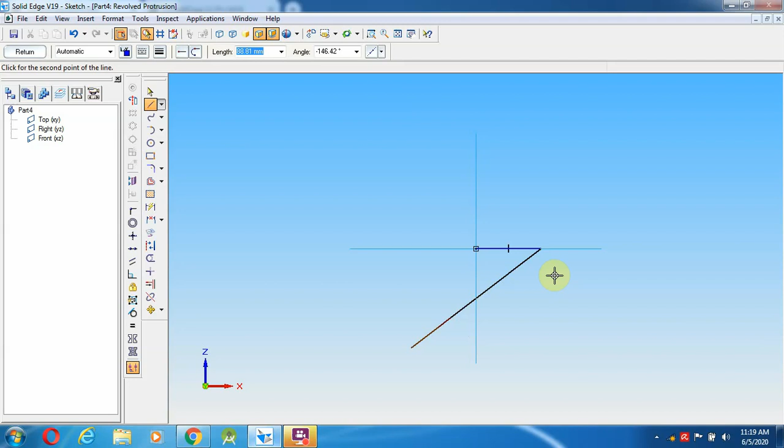Here the total height is 46 minus 26. From 26 the inclined line starts, so we are getting 20 mm height over here, and I'm going to stop.

Then from here I am going to draw a 46 mm height line.

And what is the diameter for this? It is 46 mm, height also 46, and diameter 46 means a 23 mm line.

After drawing the 23 mm line, we can directly join it because no angle has been given over here. After drawing this, on the top use the fillet option.

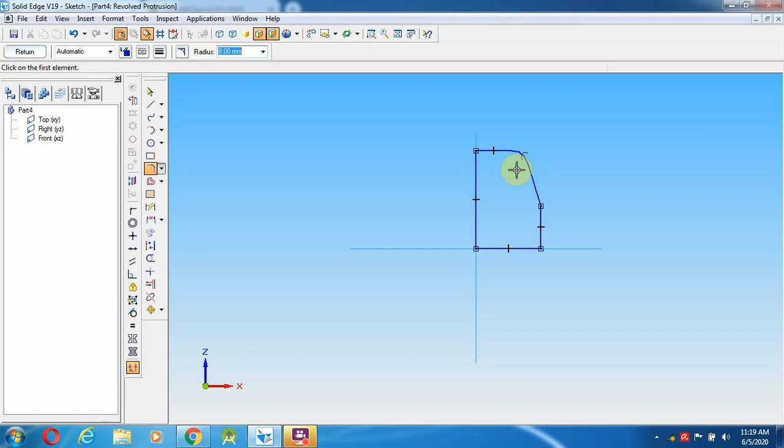The radius given is 8 mm over there. So here you can see the radius is 8 mm.

Then coming into the middle, the hole is coming. That hole I am going to make as 25 mm, M25, meaning V-shape thread and 25 mm diameter.

First I am going to create the hole here itself, not 25 but 12.5 mm, and down.

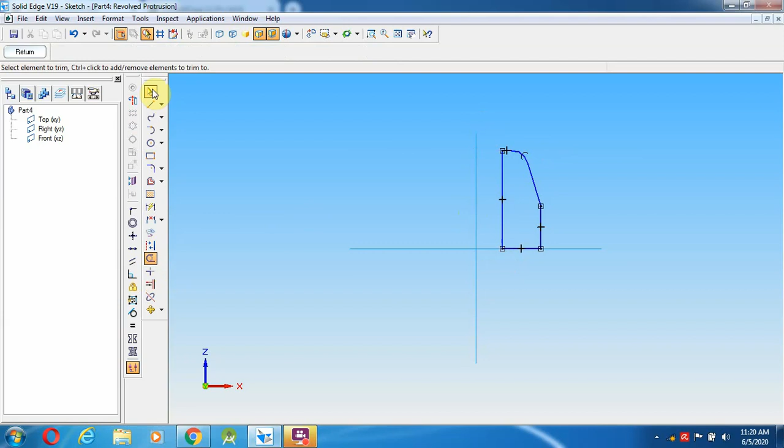Then select the trim option. The trim is for where the surface is not prepared. Then go here and select.

Select the axis of revolution as the mid plane, give rotate. I'm going to give 360 degrees, left and right click.

You can save the part as mover. After saving the part, we will make the necessary changes.

Then at the bottom there should be a small circular cutout. For this, I am again going to use the revolved cutout option and select the mid plane.

From selecting the line, from here, what is the length? The length is 46 mm, so I'm going to give 46, enter.

Going to select a circle. From here, 46 mm means that's the diameter, radius 50, and the diameter is 100.

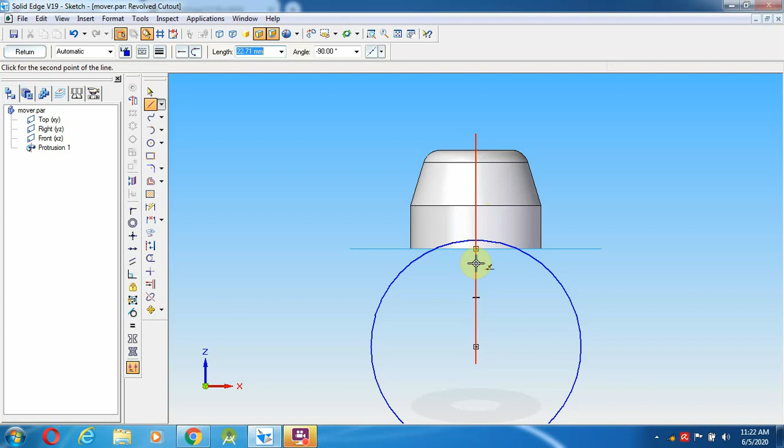So you can go over here, select diameter as 100, enter. Now I'm going to draw a line from here to here, and from here to here.

One more line I am going to draw. Then use the trim option - all these lines I am going to trim.

This one also I am going to trim, and this is also a trim, because we actually require this particular surface.

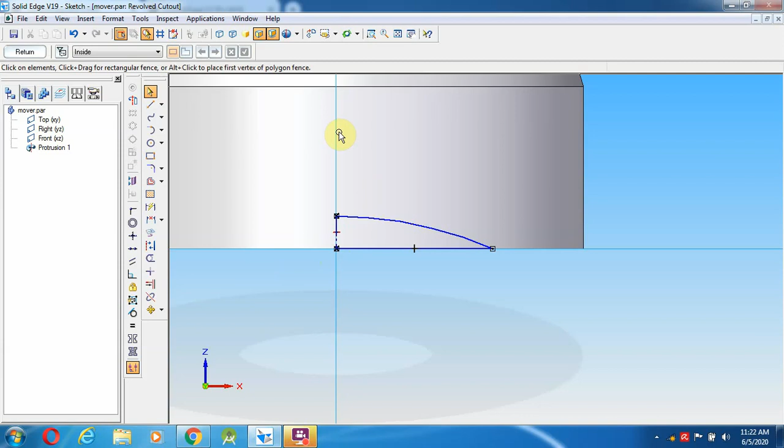Then I am going to select the axis of revolution as this one, the middle line. Even if you select the axis of revolution as a mid plane, it won't come unless you have drawn the line.

Then give 360 degrees, and after giving the 360 degrees, you can save the component. So after saving the component, what is the next step?

This is the hole I have to create from a 13 mm distance. From the top it is the 13 mm distance.

Go over here, select first with the use of sketch. I am going to make a line over here.

That line I'm going to make from here to this line. This is for reference.

And also one more line I'm going to make from the straight line, anywhere in this line, from here to 13 mm distance, to the straight line.

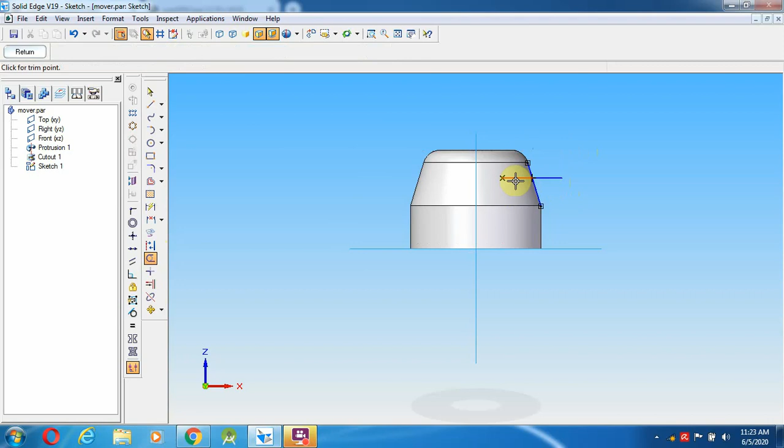After that, any one line I'm going to trim it, and this is reference - this one I'm going to keep, this is the line.

Afterwards I'm going to draw a line from exactly this particular end. So instead of deleting, I'm going to trim this side, and now select a line from here to draw one line.

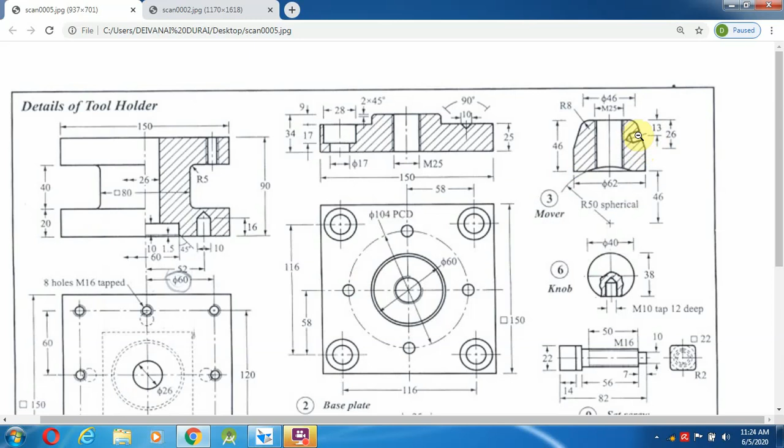Okay, so what is the distance of that line, and what is the diameter of this hole? They are not given here, so we are going to search for it.

So this mover, where will it be going to fix in the top and come to here, see over here. So here they are given as a handle, it is going to fix over in the mover. So one end will be the mover, another end will be fixed with the knob.

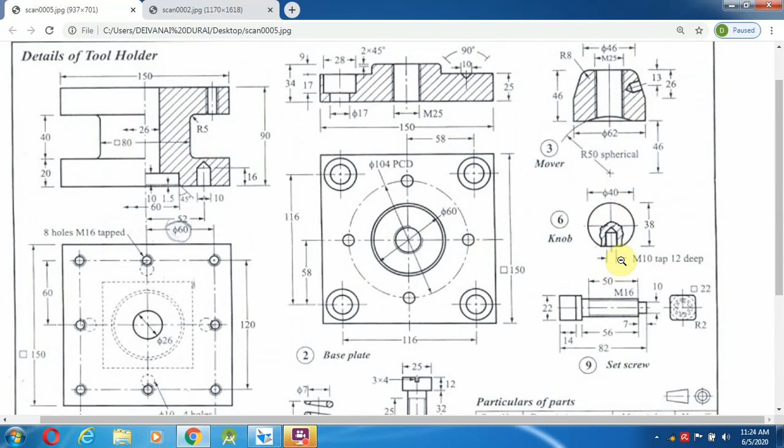So the knob diameter is given as 10, but here one more side the 10 mm is given over here on the handle, then 8 is there, so that 8 mm we have to create, the 8 mm hole having the length.

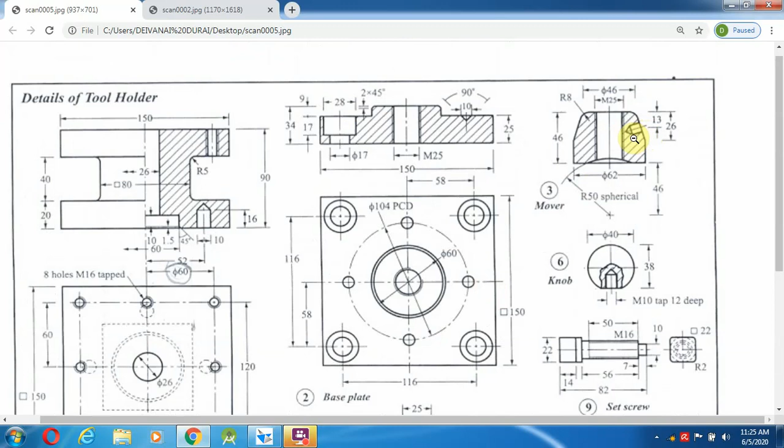So the length, how much mm - even the length also you can find over here, so that also 8 mm. So here it's not the 8 mm diameter, the diameter also same, so here also it is the 10 mm diameter only.

So 10 mm diameter, 8 mm length. So that we have to create, this hole I am going to create up to the 10 mm, 10 mm and V shape. So from here I am going to make one line of length 8 mm distance.

Going to place, then select the option called perpendicular. So this line as well as this line I am going to make it as a perpendicular one.

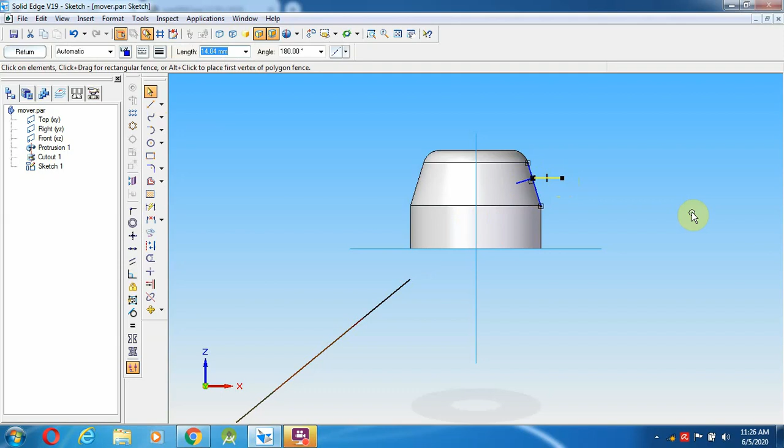Now there is no requirement of this line, I deleted it over there. Then I am coming out, so I will give the return. So after returning, go over here, select the planes.

In the plane, perpendicular to plane, normal to curve plane you can select. Then from the particular line, from the mid, I am going to place the plane over here.

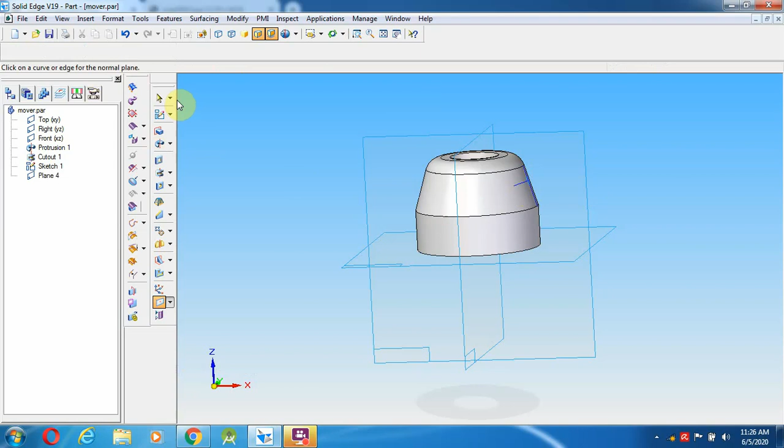Even if the plane is too small you could not see it over here. Now if you zoom, the plane can be visible. Then I can go again with the sketch option.

I can go with the cutout option. So this particular surface I am going to select. Along with the plane it is going to cut.

Better I go with the hole option. Hole, this particular plane, select a circle. So in the circle, if you move over here, the point can be visible.

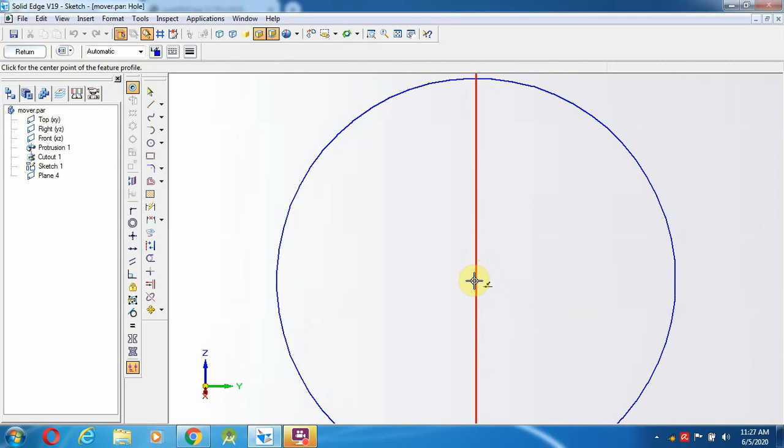Otherwise, to come out, and again you can select hole. So this particular plane you can select, somewhere in the mid it's coming over here. Select this one having the simple hole, having the diameter of 10 mm.

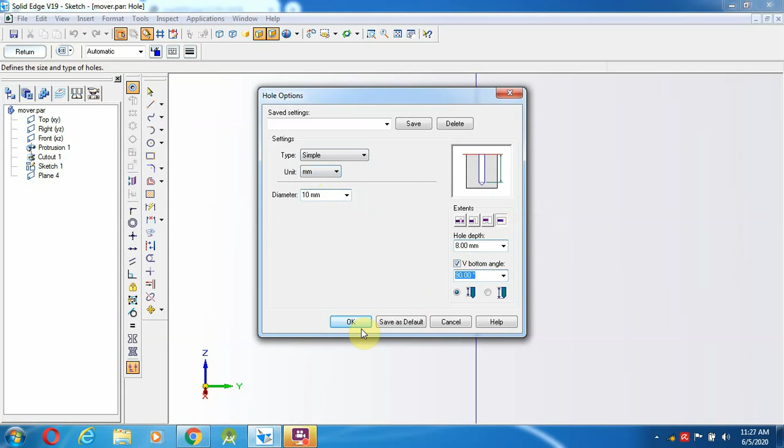10 mm, as well as length 8 I am going to give, 8, as well as the V bottom 90 degree. Give OK, I am going to place exactly in the line.

Okay, then going to give fit. I am trying to rotate, to check if it is correct or not. So exactly we will place it in the point.

And give return, left and right click. So the hole has to be created over here, exactly. So this is the way the hole has to be created.

So after creating the hole, then we can go and search over here if anything is pending. Only thing is that threading has to be done over here.

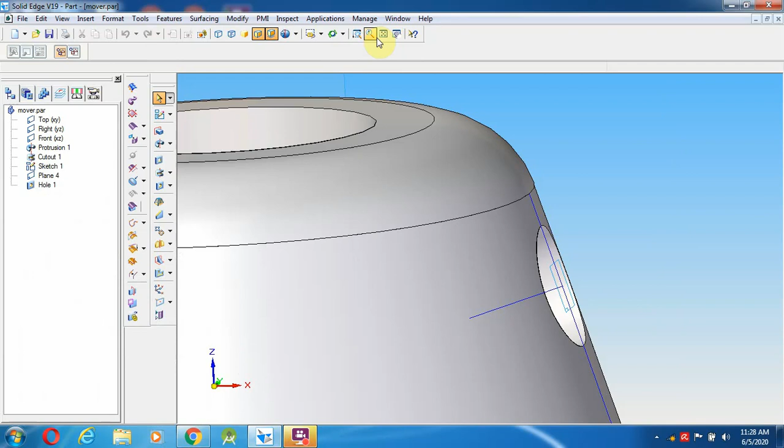So go again with the hole option, click over here. The threading can be seen, straight thread from inside, from top to bottom, and left and right click. The threading has to be created over here.

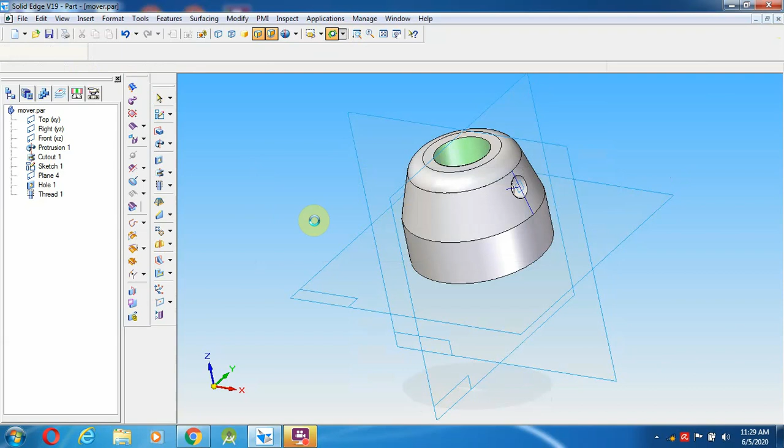Okay, so after creating the thread, again close this mover. Okay, so after closing this mover, yes, change the path, then go to the next one. What is the next one?

The third and the fourth component is the stud. It was very easy because of the single part, it can be completed with a single profile. So what is that? The diameter is 25 mm.

So M25, up to 6 mm, 60 mm length from this side, it is coming as threading. This side 30 mm length, the threading is coming over here. Okay, so how to create these things.

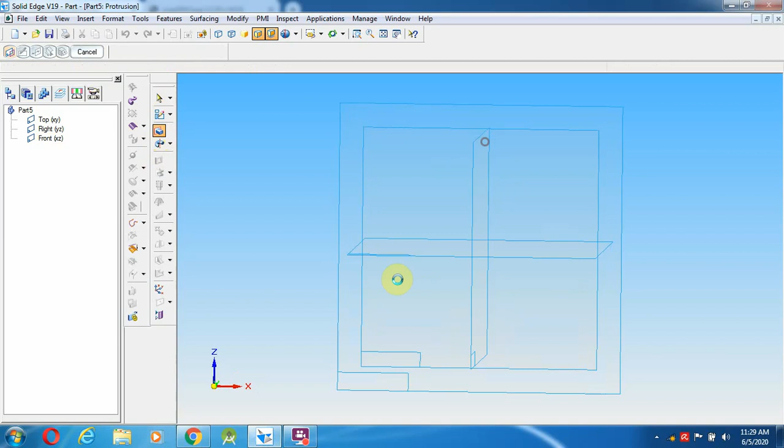First select a protrusion from here, and what is the diameter? 25 mm diameter. Select a circle from here, 25 mm diameter, and go over here, return.

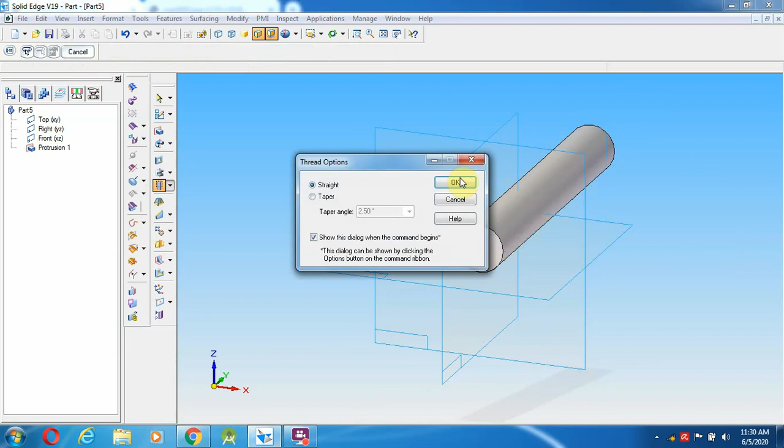So how much distance does it have to come? 160 mm. So go and select 160, enter, left and right click, and go to the threading option here. Give OK, thread starting from here.

So the finite value is 60 or 30, I am going to give over here. So I am going to give the distance, 30. Okay, enter. So even though it will go to select as a full thing, it's not an issue.

You can save this as a stud. Save as, and that will be the fourth one, it's called stud.

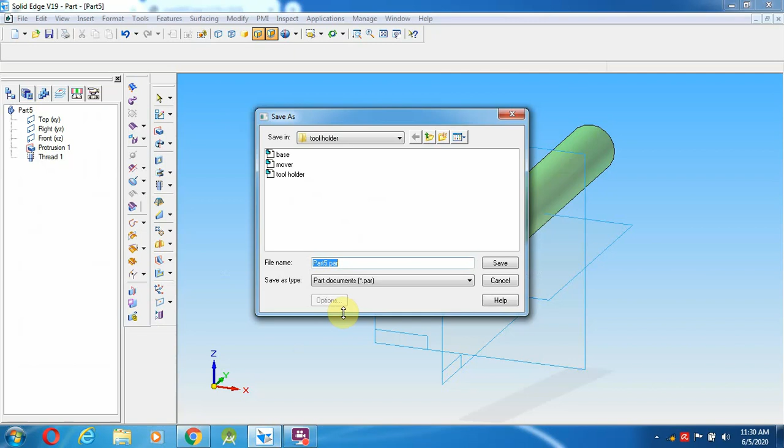Stud, stud, save. So the fourth component is over. Then comes the next one, the fifth one. Which is the fifth one? Second, third, fifth is the handle. Handle is also similar to this one only. So go over here, select.

Solid part on the protrusion, select circle, diameter is 10 mm, having the length of 114 mm. Enter, left and right click.

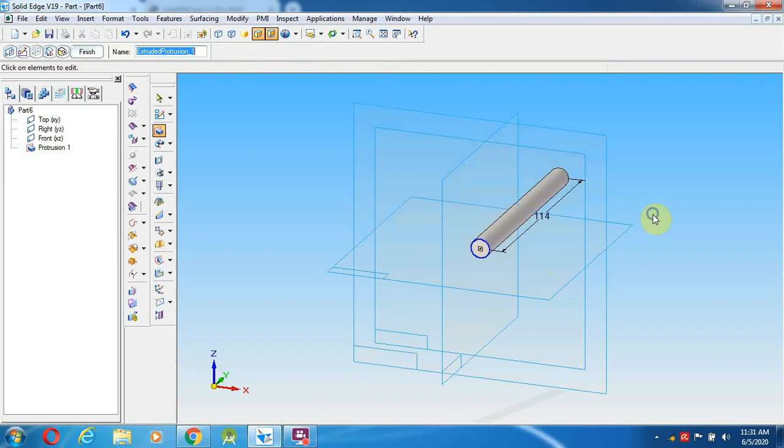Goes to thread again, give OK from the component starting from here. What is the length? 10 mm. So I am going to give the finite value as 10 mm. Enter. So even this also comes full length, it's not an issue, we can give over it.

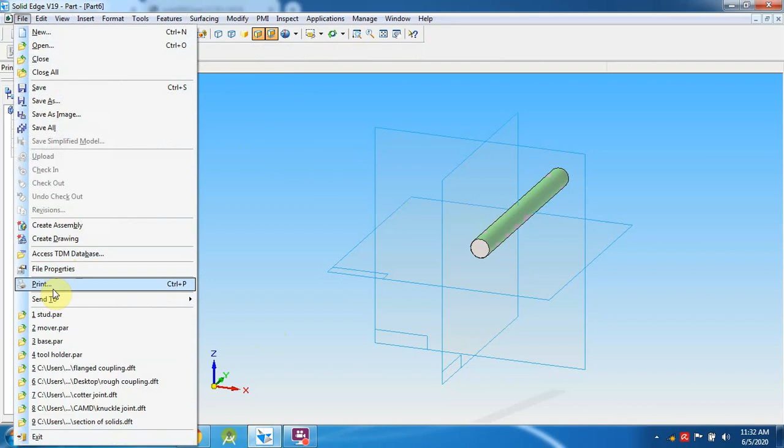So then this has to be saved as HNDL, handle. After that, going to close it.

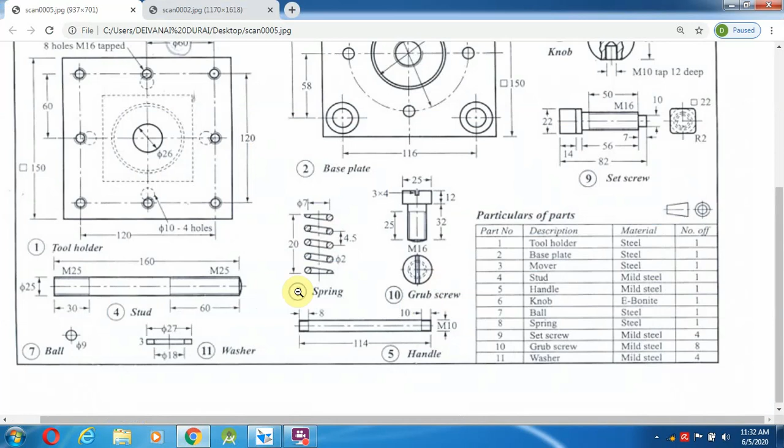Then the next part, which is the next one, fifth and sixth one, this is the knob. Okay, so that we will see now. Knob. So the next thing is we are going to draw the knob.

So to draw the knob, what is the diameter of the knob? It is 36 mm. From bottom, top to bottom is 38 mm.

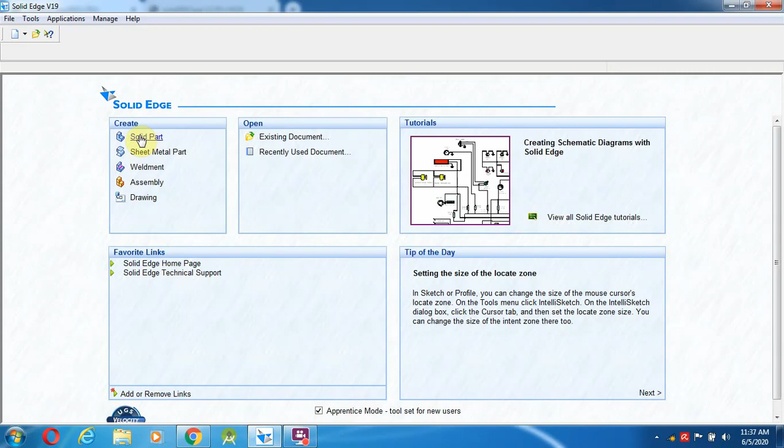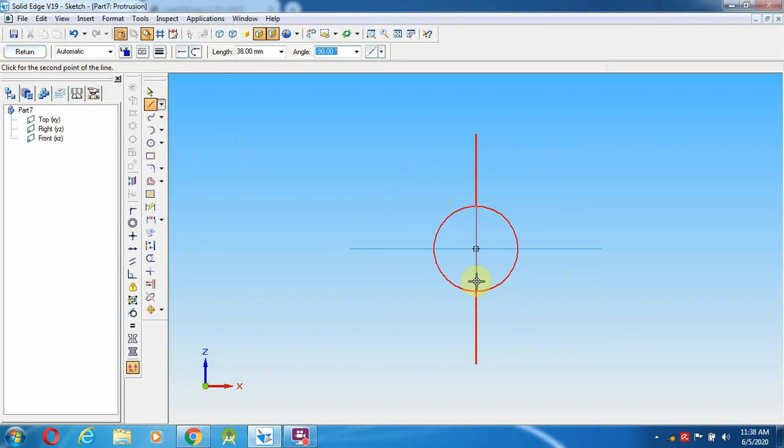Select solid part, go to here as a protrusion, select any one of the plane and go to draw the diameter. Select a circle from here to draw the 40 mm diameter. After selecting the 40 mm diameter, from top to here is 38 mm. Enter towards straight horizontal line and go to over here.

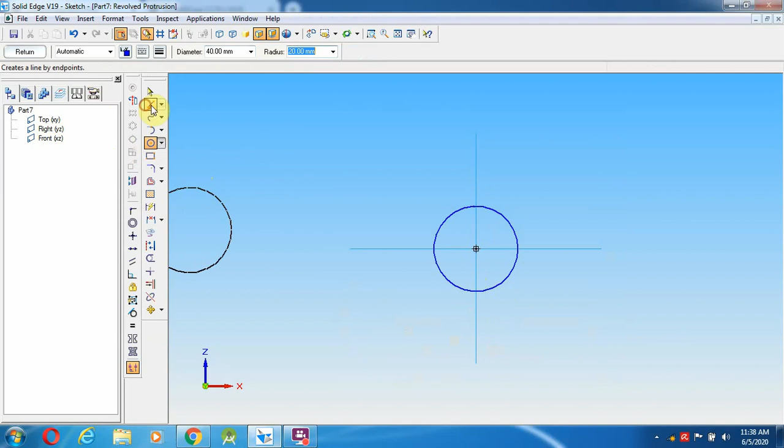So this I am going to draw with the revolved protrusion option. Mistakenly I selected the protrusion option, so I am going to return, select a revolved protrusion option, select the plane again. Go over here, select a circle, diameter is 40, select a line from here to 38, enter and straight line.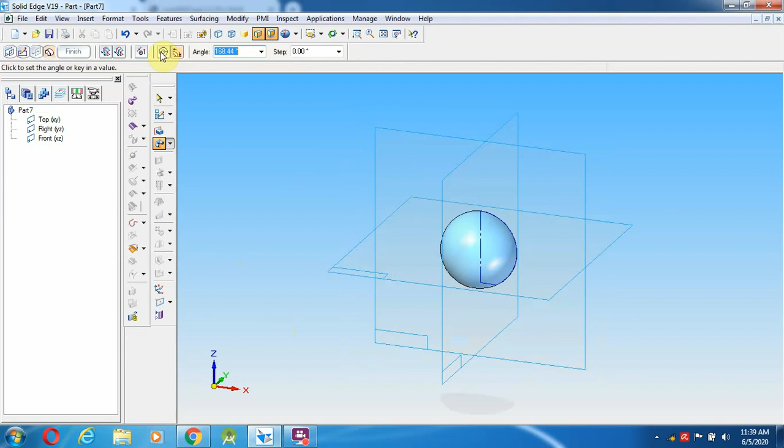Then I am going to trim the surface, this as well as this. After trimming, go and select the axis of revolution, as this is the axis of revolution, and give return. The angle is going to be 360. So the protrusion has to be created over here.

So here the thing is, what is the one more thing? The small partial section made over here, that is the M10 tap, 12 mm deep.

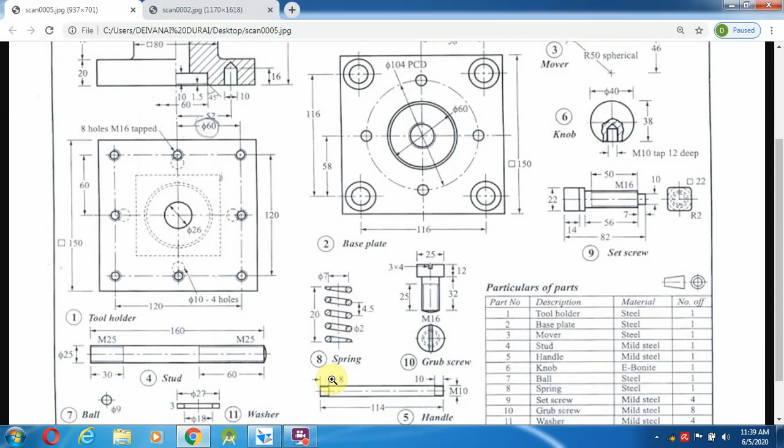Go to the hole option, select surface from here, hole parameter simple, 10 mm diameter, 12 mm deep, and also it is the V bottom, 12 mm deep, 10 mm, 12 mm deep and V bottom. So V bottom, that is 90 degree.

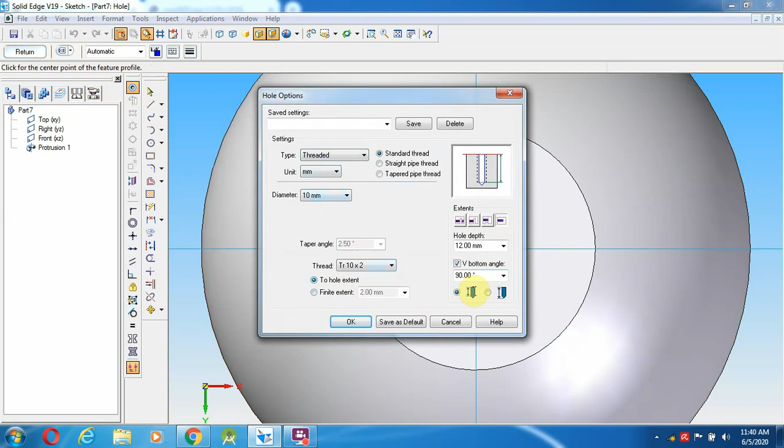Then I am going to keep. So before that, what is that? So not a simple threaded one, threaded 10 mm, even here also the diameter to hole extent 12 mm give over. So I am going to keep over.

After that, going to give return, left and right plane. So this has to be saved as knob. Remove B, knob, save. Okay.

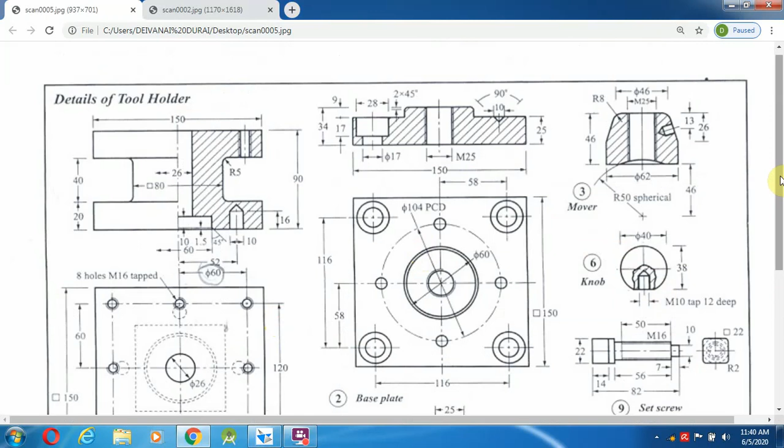So after saving this knob, what is the next thing? Almost all the thing is completed for the knob. Will be completed. Then 6th, 7th one.

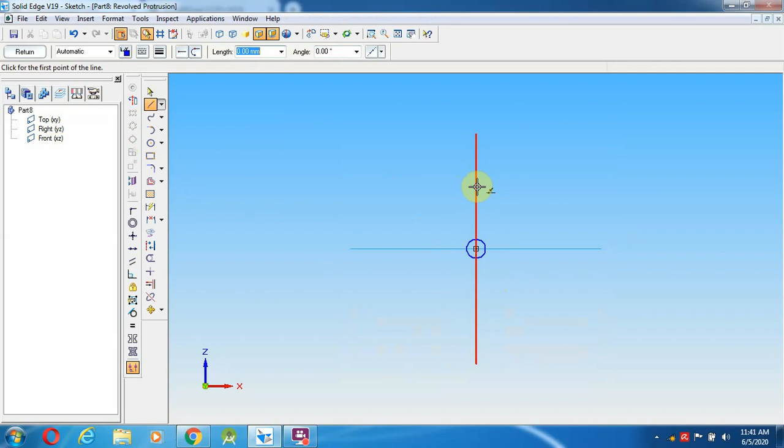7th one is the ball having the diameter of phi 9. So go over here, close this knob and select a solid part and go to over here. Again select revolve protrusion, having select the circle having the diameter as 9 mm, and draw a line from here to here, straight line. Select a trim option, so trim here the bottom.

Select axis of revolution as about this line. Going to give return, angle as 360, and left and right leg. Okay, so this ball you can save as ball itself, having 9 mm diameter ball. Okay, so then you can close it.

Go for the next one after ball, 7th, 8th, the helical spring.

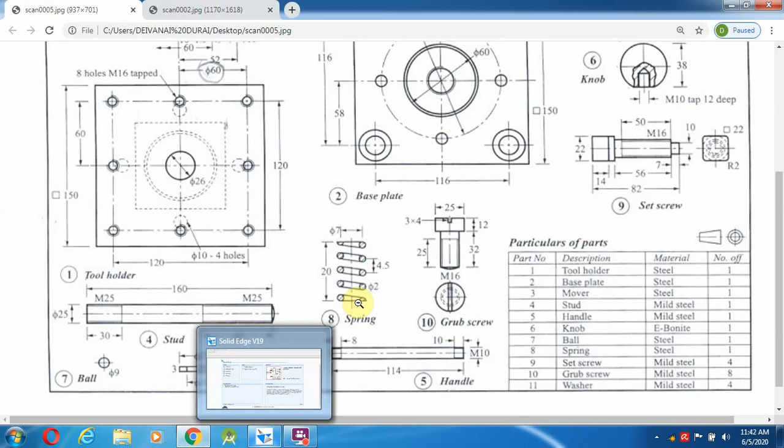Okay, so for drawing the helical spring, the height is 20 mm. So this length is 7, as well as the diameter is 2 mm.

Go to the solid part, select the sketch option, draw in the front view, select a line from here to a 20 mm line, as well as from here, total distance is 7. I'm going to give 3.5 mm.

After giving the 3.5 mm, I'm going to zoom into the particular area. From this end, select a circle from here to 2 mm diameter, and create it as a circle.

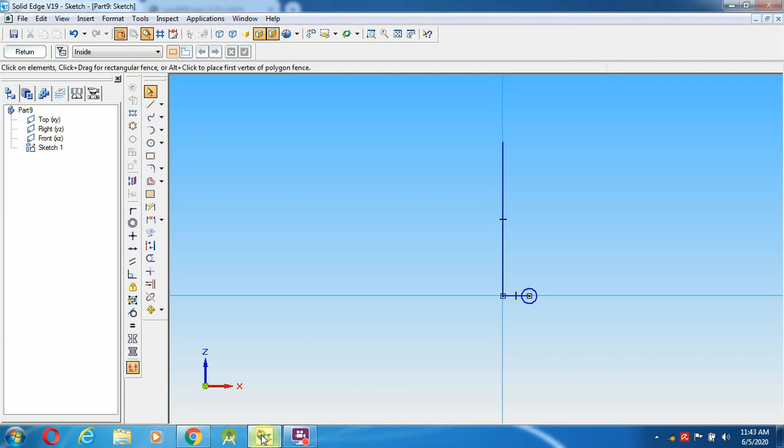So after creating the circle, the distance is 4.5, 20 mm height. Those things I gave are coming out correctly.

So after that, go to the option called helical protrusion. First I'm going to select from the sketch. From a single sketch, first I'm going to draw a guideline, then OK.

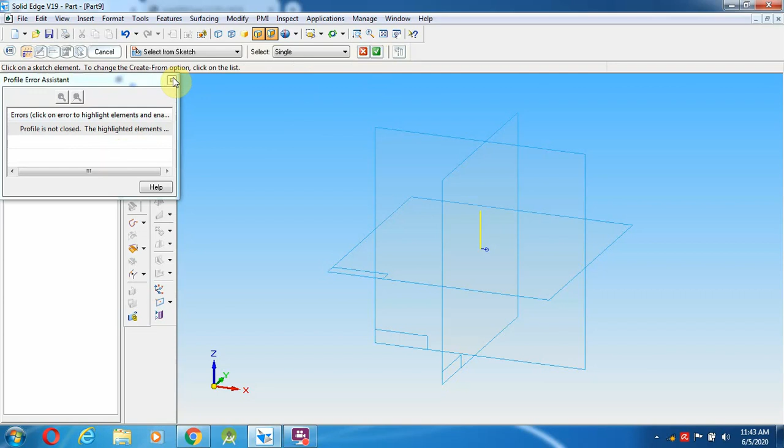Actually, first I'm going to select the profile, select sketch, and select from sketch. So this particular profile, right click, and set up to which height - that's the height. Then what is the pitch? The pitch given here is 4.5, so you give 4.5, enter, and see the preview.

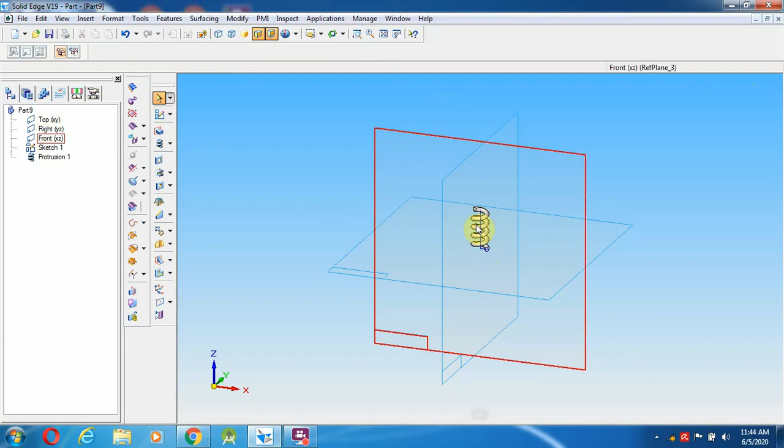So this is the way you have to create the helical spring. First we draw, as per this one, the sketch mode base profile, and according to that we create the helical spring.

So this I am going to save as helical spring. So this is the part where you have to concentrate somewhat.

So after creating the helical spring, the 9th part is the set screw. For the set screw, certain points you have to remember. Here they give us 22 up to 14 mm length. Again certain things they provided over here.

So if you see in the side view, the 22 is a square, they gave. All other things are given in terms of a circle manner, so all the things will be in diameter only. First I am going to create this.

After that, this portion has the 22 mm diameter up to a certain length. Then again, the M16 bottom part also shows like a circle - that is the 16 mm. So these are all the things we have to make.

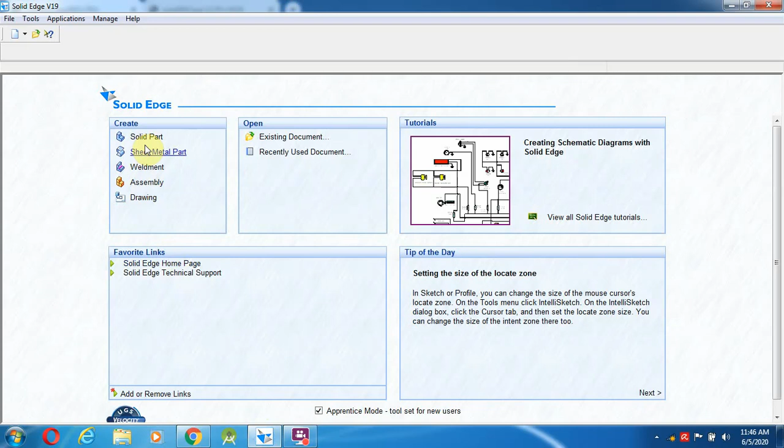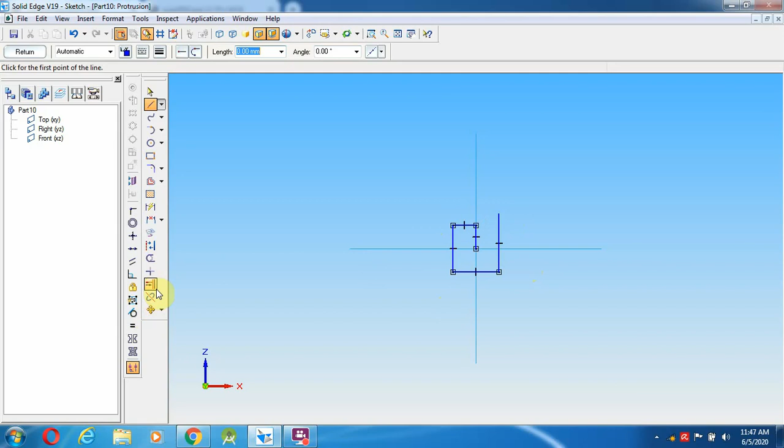Go over here, select the solid part, go to protrusion, select the front plane. Select a line, from line to 22 mm means 11 mm towards left, 11 mm, and 22 mm. Extend to next and trim these things. After that, give return.

So for this 22 mm, how much depth am I going to give? 14 mm, so towards that side, 14. Okay, giving 14.

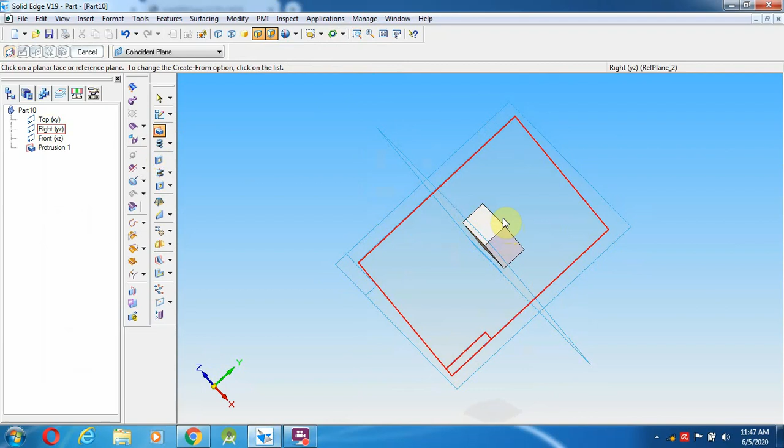Again I am going to select protrusion on the other surface. Here I am going to select the bottom surface - this is the surface. Now I am going to select...

Circle having the diameter of 22. So this I am going to give the depth, 82 minus 14 minus 5 mm, already we found.

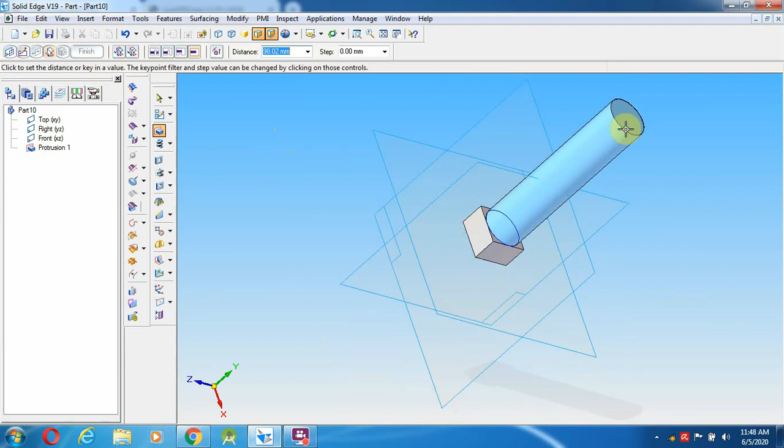Anyhow we'll check it. 82 minus 14 minus 7 minus 56, enter. So it is coming as 5 mm. So that 5 mm only we drew over there.

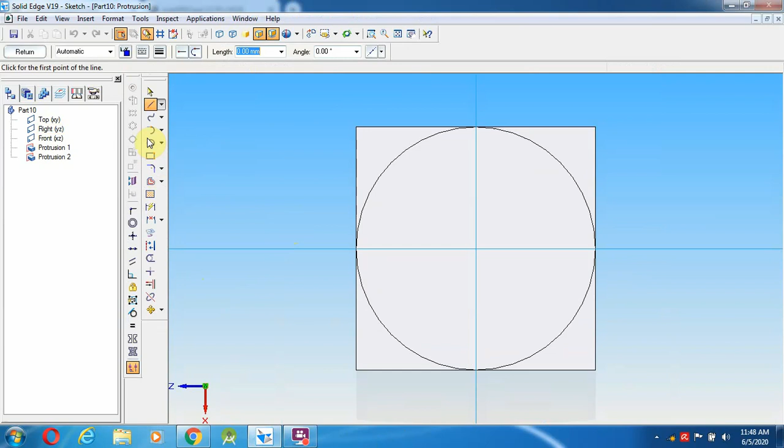So after giving the 5 mm, what is the next step? M16 having the length of 56 mm. Go over here, select protrusion, from here select a line, circle 16 mm diameter, give return. So 56 mm length.

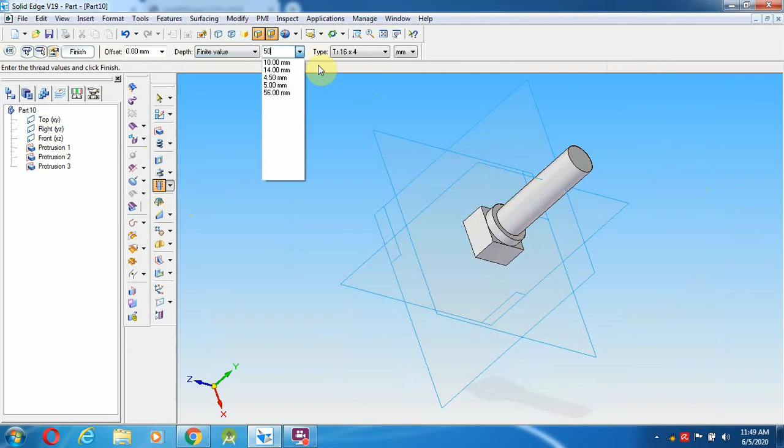So this itself I'm now going to change to the thread. Starting from here, finite value up to 50 mm, enter. But even though it will be selected as full, it's not an issue.

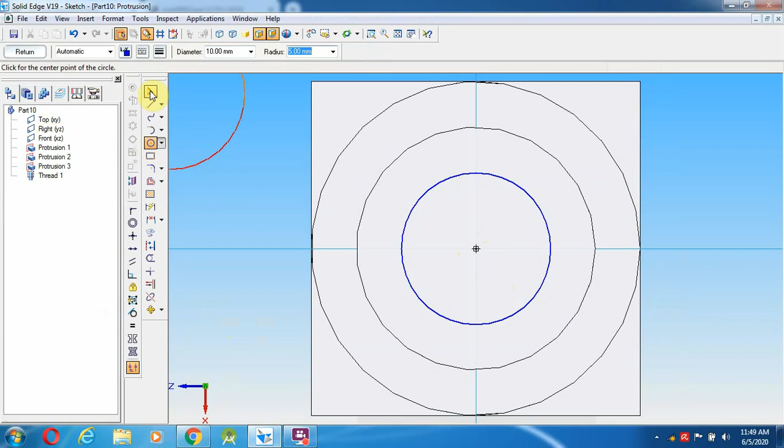Then comes the last one, that is 10. So those 10 mm I'm going to draw. Select protrusion, from here select a circle, mid from here to 10, enter. So return, I'm going to give a length of 7 mm distance.

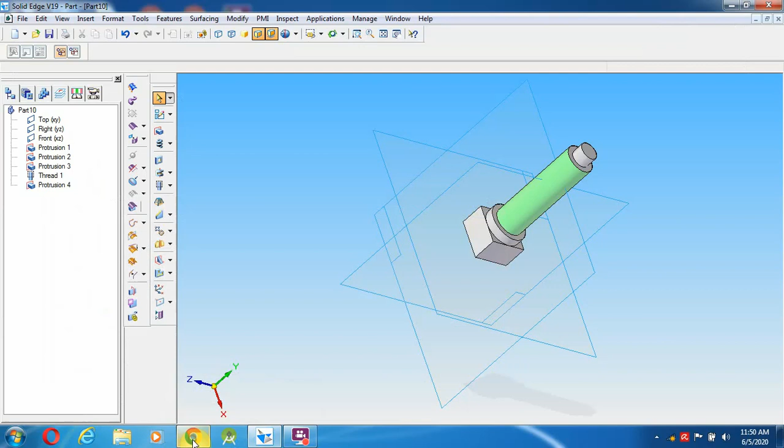I'm going to do 7. Okay, after completing this, I'm going to make it so this ends with a 2 mm radius. That radius of 2 mm will be provided over here. Even that you can do from here itself - round from here 2 mm.

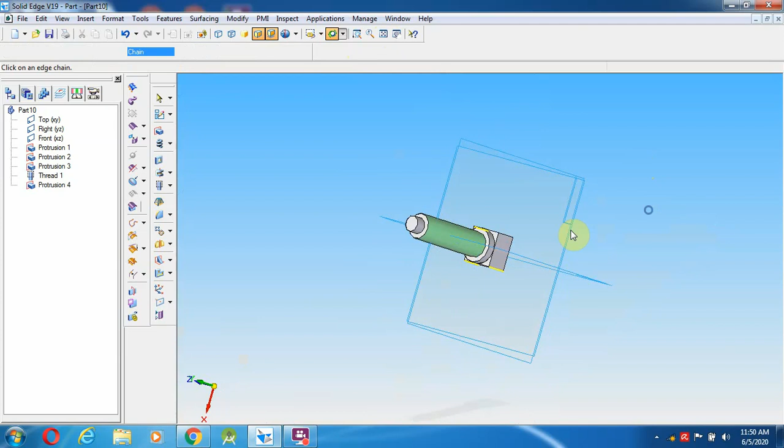Enter 2, enter 2, enter. Okay, so this is 2 mm. Okay, right click, left and right click.

So those things has to be created. You save as, the component name itself, 9, set screw. Set screw, save. After saving this, go to the solid part, select 9th. So after 9th, the 10th is the grub screw.

Okay, grub screw. So this is having the 25 mm diameter on the top and bottom 16 mm. So even how I can take this diameter - while seeing from the top it will be like a circle, so that 25 is the diameter.

So select with revolve protrusion command, these things I will draw in a single profile. So 25 mm, 12 mm diameter, 16 mm, 32 mm diameter as the length, 16 mm diameter.

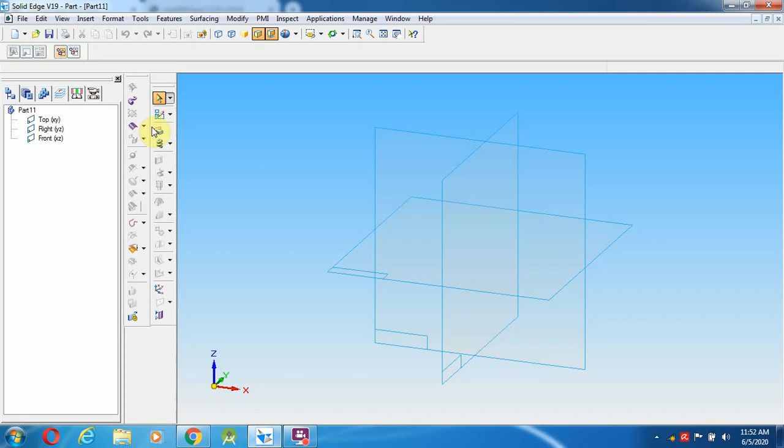Select here revolve protrusion. From here I'm going to draw a line from here to here, so I'm going to start with the height. Height is 32 plus 12, 44, 25 mm diameter, 44.

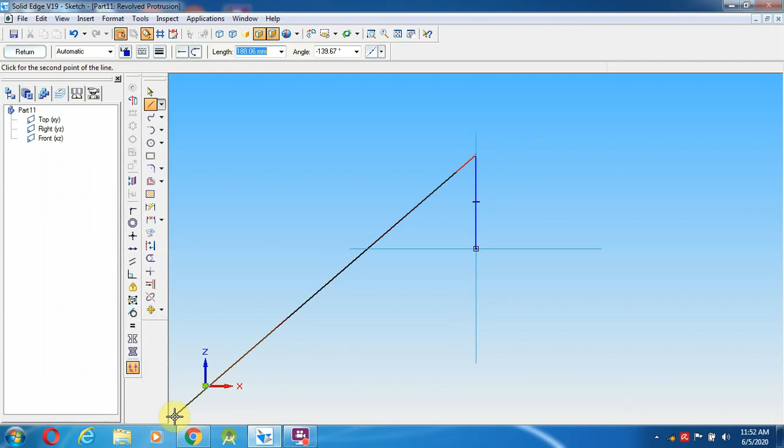And what is the diameter? 12.5 and 16 - sorry, 12.5 is the radius, 12.5. So this is the delete.

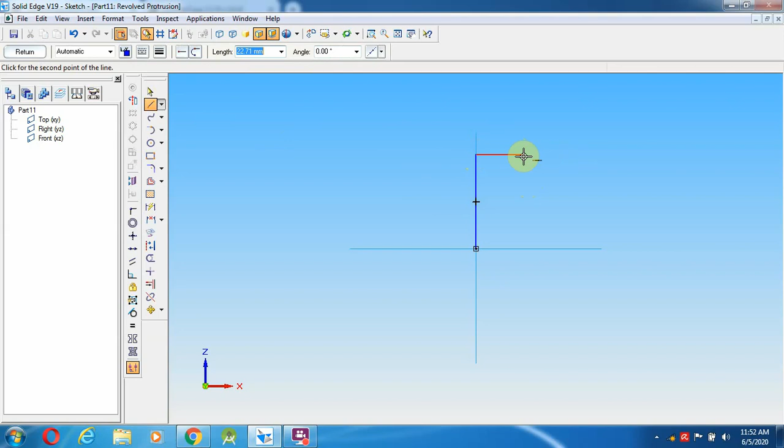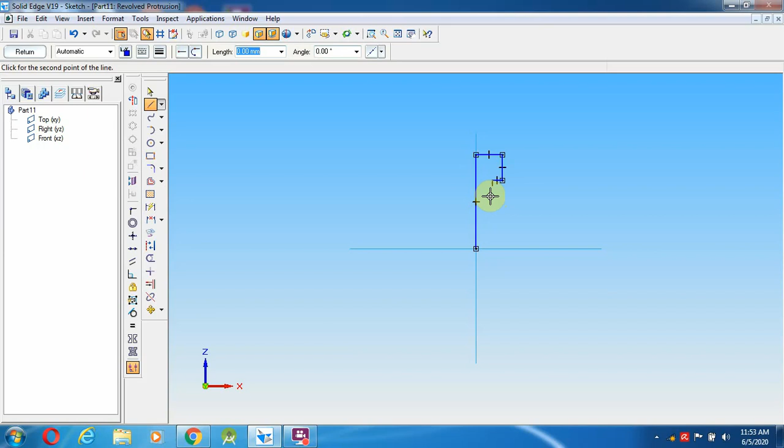Select a line from here to 12.5 mm and down 12, and towards here 16 means 25 minus 16 is 9, so 9 means 4.5 this side, other side 4.5. So 4.5, I'm going to join over here.

Now I'm going to check the dimension of this, is it correct or wrong. So 8 mm - 16 mm means one side it is 8 mm. So after this,

the bottom small curved edge test which comes over here, that you can make or not make, it's not an issue. Okay, so now we have to make these things.

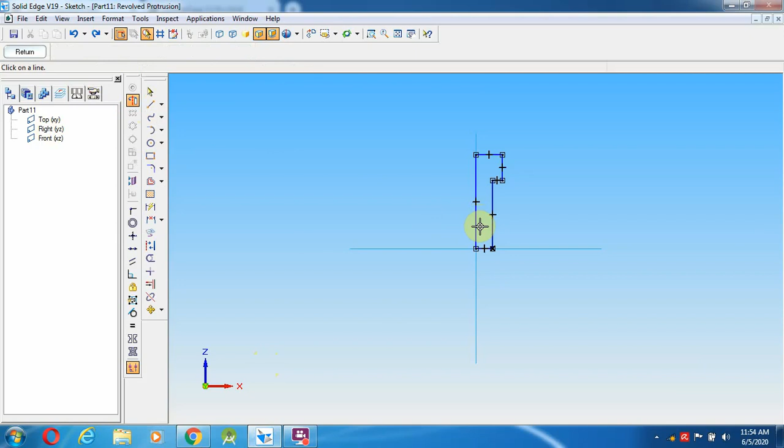Select axis of revolution. So after giving this, I am going to select the axis of revolution as this, give return, and I am going to give 360 degree angle over here. Okay, so after giving the 360 degree angle, then go on make the cutout of this one.

So here the cutout they will be providing is 3 into 4 mm. That means 4 mm depth, 3 mm length. So that you have to make it.

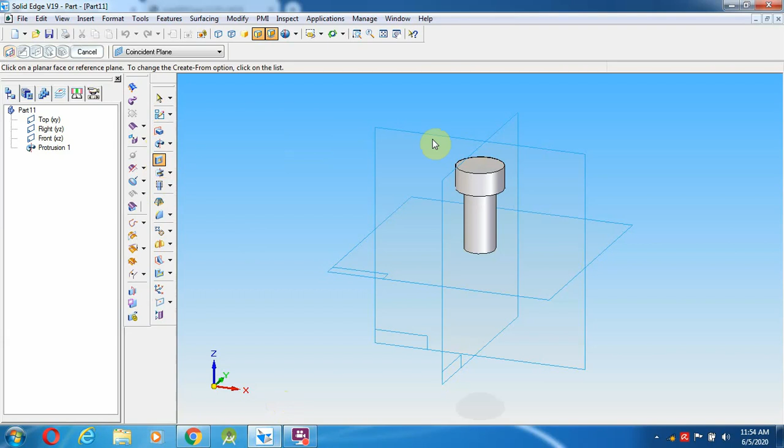So go here, select the option called cutout, from here to that, from middle to 1.5 mm, 1.5 and enter. So throughout the length, again here 3 mm.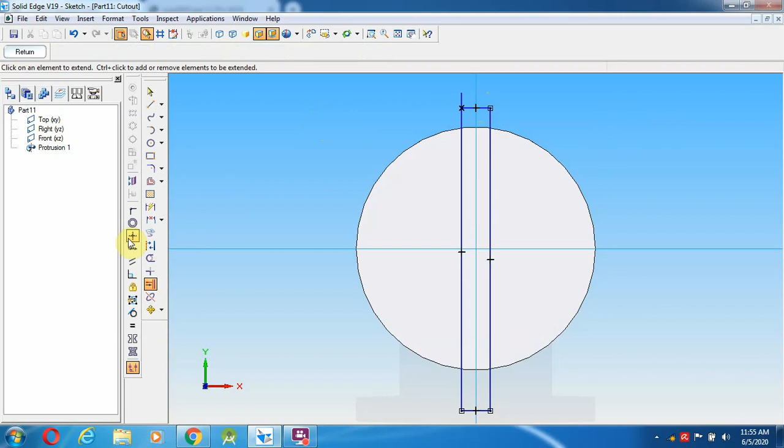Now we are going to make it top to here, then select extend to next, then use the trim option and trim it, then give return. So the depth I am going to give as 4 mm. So 4 mm, left and right click.

So the grub screw has to be created over here. Go to here, save as, component name is the grub screw.

Save over here. So totally how many components has to be created? 1, 2, 3, 4, 5, 6, 7, 8, 9, 10. So the 10 components are created.

Then which is the one more thing, 11th one, that is the washer. So the washer, what is the washer diameter? So 27 as well as 18 mm.

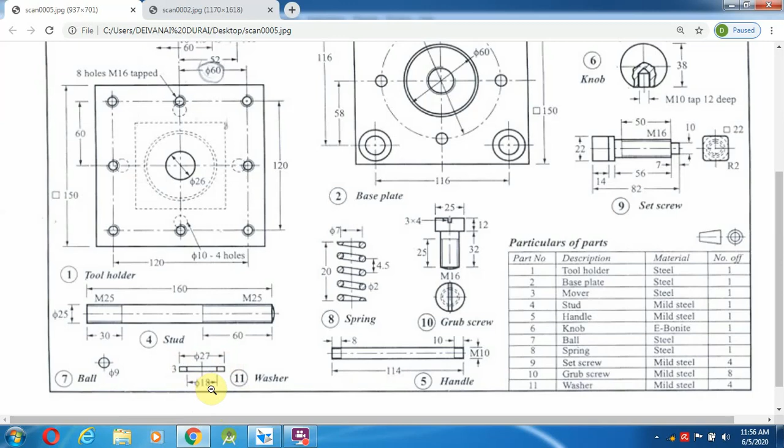Okay, so close it, go to here, select solid part, protrusion, 27 and 18. So from circle, maximum diameter is 27, enter, and select a circle, minimum diameter 18, 27 and 18, and going to give return.

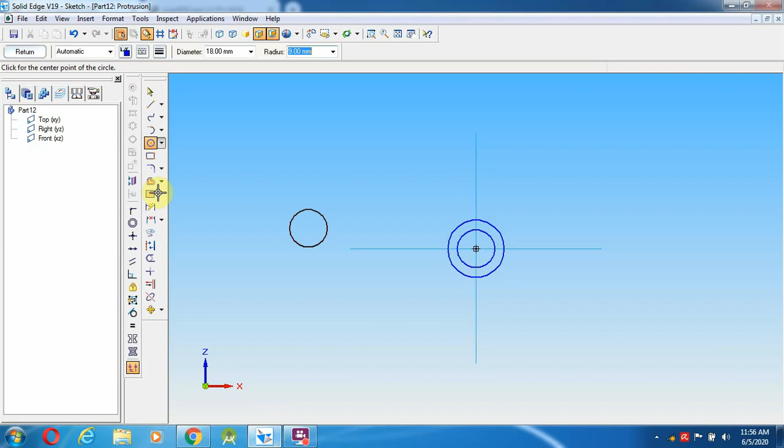So this will be 3 mm depth. Okay, so can give 3, enter, left and right click. So with that the washer is created over here.

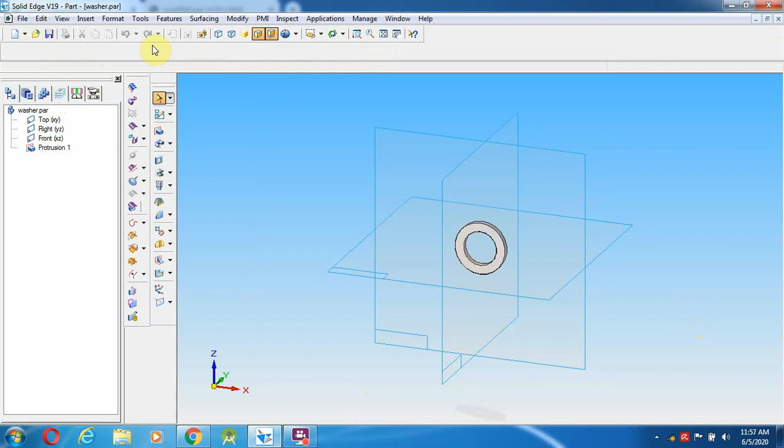Save as a component as washer. See, and close it. So with that all the components has to be created for the tool holder. The assembly we will see in the next video.